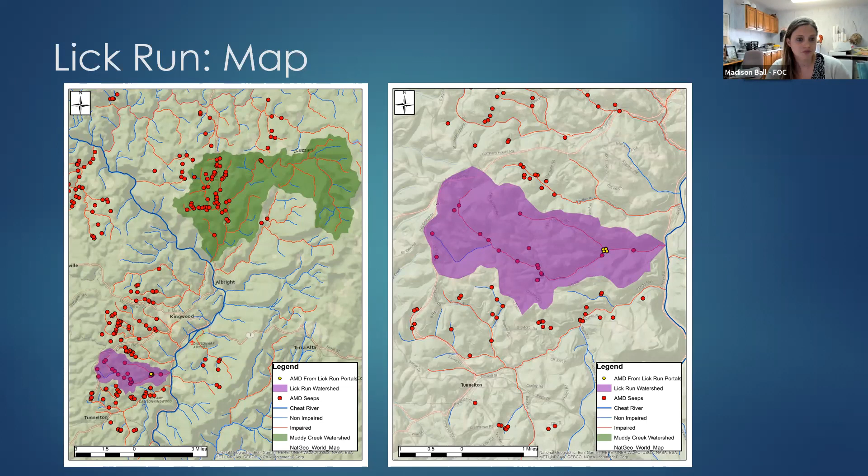Going into the history generally of the site. So it was mined extensively prior to 1977. In between 1977 and 2007, there had been different efforts from other entities to restore and reclaim this site. Notably, I think the Army Corps of Engineers in the 90s had pursued different projects in this area.

But Friends of the Cheat, we did acquire the property, specifically that cluster of portals that I described in the previous slide. We acquired that property in 2007 for $1, which was a strategic effort on our part to be the landowner when and if the technology and the funding would exist in the future to treat this source. That would be just one less barrier to restoring the water quality here, not having to negotiate with a private landowner. So we would be the owner of the property. We're no stranger to adopting or purchasing some of these problem areas for future efforts. So that was something we accomplished in 2007.

And since then, in 2017, there was a land reclamation project that the West Virginia Department of Environmental Protection, their Office of Abandoned Mine Lands, pursued. In this project, you can see the photo on the right. That's one of those portals.

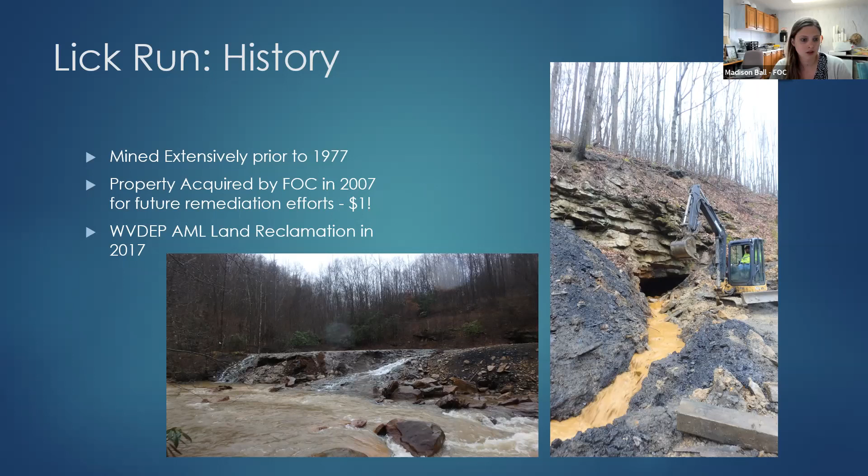Here's a picture of that scab a little bit higher up, where you can see that big deposit in the portal. In the photo on the left, you can see the portal where the water is emanating out of. That's pretty much what it looks like today. The rest of the portals at the site look like the photo on the right, where they've been addressed and that water can flow out safely without causing any potential issues down the road.

In terms of water quality, as I mentioned, with Muddy Creek being tackled and for the most part meeting its water quality standards, Lick Run is now our most significant contributor to acid mine drainage in the Cheat. This was more of a fun graphic. I've got some actual hard data that I'll go over in a moment. This is just a fun educational graphic we made a few years ago, using tons to show Lick Run surpassing Muddy Creek.

2019 was the year, I believe, where the Muddy Creek treatment plant had not fully started to treat until midway. So this was an average of our data through the year, which is why you're still seeing some of that iron in Muddy Creek. Additionally, it's important to remember flow and just how potent the water in Lick Run is. The flow of Lick Run is much smaller. It's a much smaller watershed than Muddy Creek.

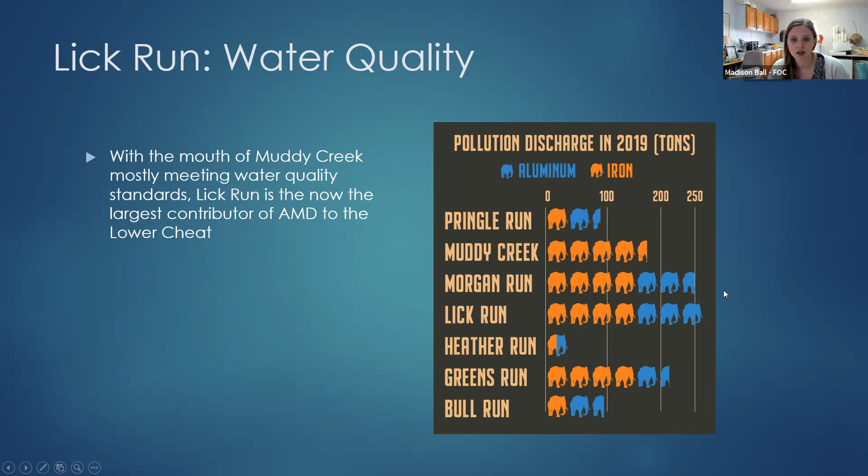So that highlights, and I'll show that later in the slides in our data, just how concentrated this water is, because Muddy Creek has flows sometimes 4, 5, 6 times higher than Lick Run, but yet now we have Lick Run contributing these high levels of aluminum and iron.

So what does that mean for the Cheat? These are some aerial shots taken in 2019. Where you see this very dark red spot, that's the mouth of Lick Run, very small compared to the Cheat River main stem. In low flow conditions, this creates this crazy rainbow sherbet effect of pollutants. So we're seeing the iron fallout, the aluminum fallout.

What's really concerning is how this is compounded with climate change. We know through other studies that we've partnered with NASA on that the Cheat River in Preston and Tucker counties is experiencing more dramatic high flows, but also low flows in drought conditions. So when there's not enough water in the Cheat main stem to dilute the potent water that comes from Lick Run, we're seeing these effects.

It doesn't take a rocket scientist to understand that this is a very huge impact for any sort of aquatic species living in this reach of the river. And I would argue it essentially creates an acid barrier, probably, for mobility of our aquatic species.

So digging a little bit into the water chemistry and the water quality, I've pulled out what we call our mouth sweeps. We do these twice a year. I just pulled our most recent set in October as an example, but we do have a pretty extensive data set. If anyone is ever interested in that, please reach out to me at any time and I'm happy to share our data.

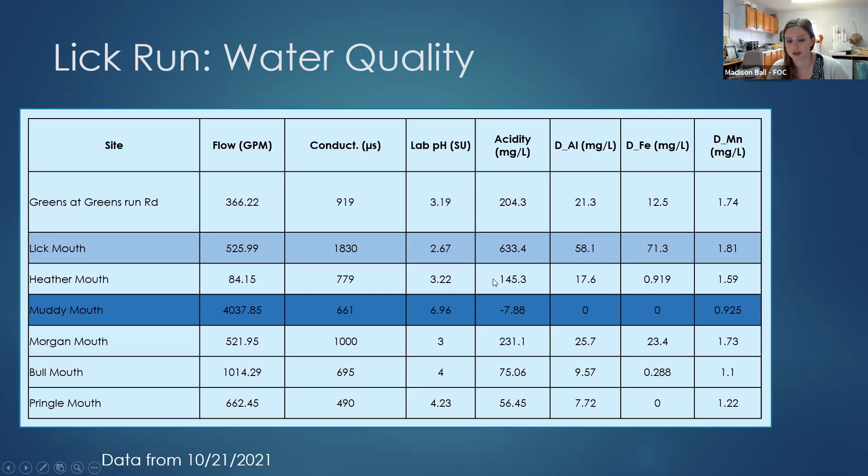So how that relates to loads. So right now, based on just the snapshot of data from October, we're seeing Muddy Creek contributing pretty much no acidity loading, actually providing alkalinity. I didn't include alkalinity in the slide before, but we do have that data available. So actually boosting the alkalinity in the Cheat main stem at the mouth.

And then when it comes to our dissolved aluminum and iron, we have very minimal amounts. And we also have very high dissolved aluminum and iron for Lick Run.

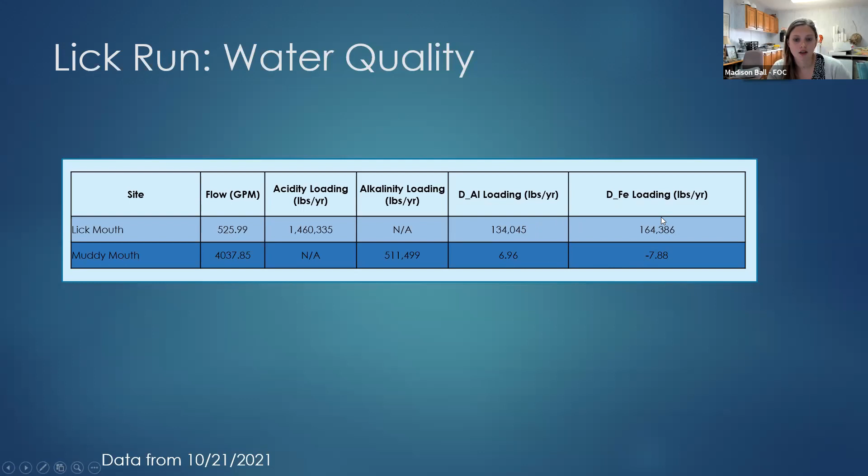In terms of treatment options, this has been a really difficult site. It's very challenging because of these extremely high concentrations of pollutants. It makes passive treatment options very, very limited. A few years ago, we had hoped to secure funds for a potential pre-treatment option to potentially reduce some of the iron loadings in this site. But unfortunately that didn't pan out.

And when it comes to active treatment options, which seems like a better fit if we are going to actually completely tackle the water quality issues at this site, we have extreme challenges with topography. Lick Run exists in a very tight holler, so to say, and there's not a lot of flat ground to build a treatment facility. The one site in question is already being developed for our trailhead for the Cheat River Rail Trail.

On top of that, there would have been a lot of challenges with piping that water to a treatment facility. And additionally, to put a treatment facility right at the site with our portals, we don't have electricity. There's no sort of infrastructure at the moment to bring electricity up into that holler. It would all have to be developed from the bottom level.

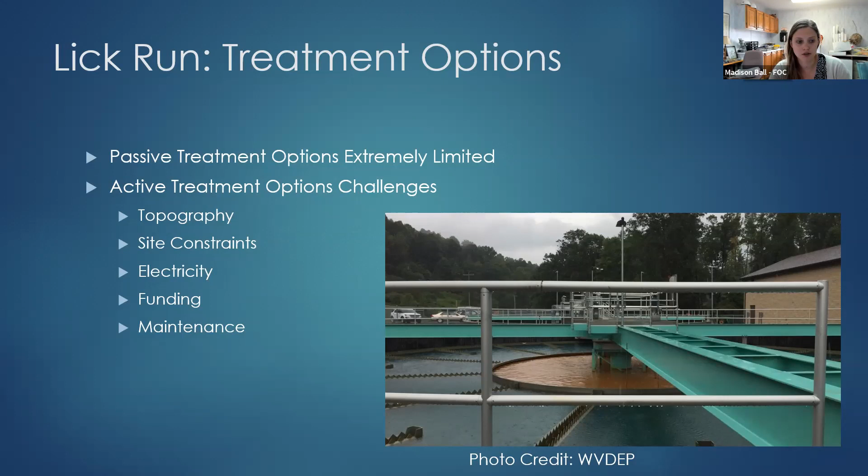And in terms of the future, what does it mean for the future? We are hopeful. Like I mentioned, we do think it was a good move to purchase the property for future development. And it sounds like there is some hope on the horizon in terms of the big infrastructure package and what that means for Lick Run, if there's potential to tap into those resources to address the Lick Run site.

Regardless of funding, it will take an innovative approach and thinking and likely partnerships among many groups to tackle this issue and design a site that is appropriate for the different elements at this site.

And then there's also the exciting prospect of rare earth elements because of the high concentration and unique water chemistry at this site. It does appear that this could be a very lucrative site for the development of rare earth element extraction. But we know that that's very new and kind of a breaking edge. So we're just kind of waiting to see what that could look like for Lick Run.

And with that, that's a summary of my presentation, and I'm open for any questions or thoughts.

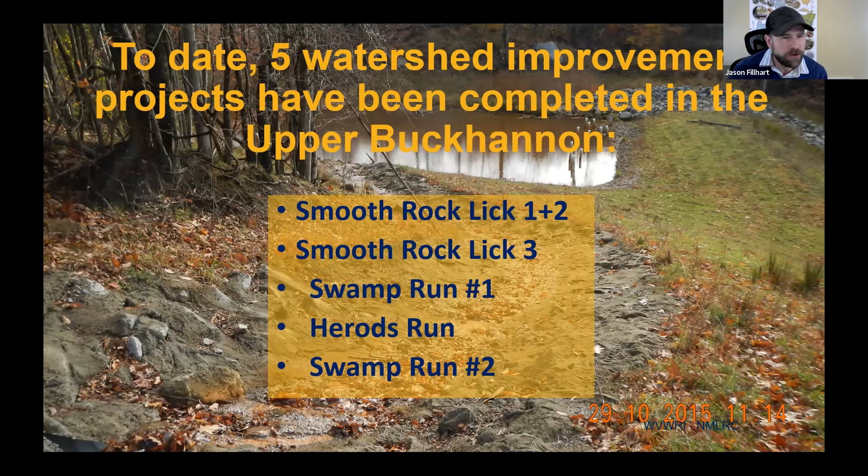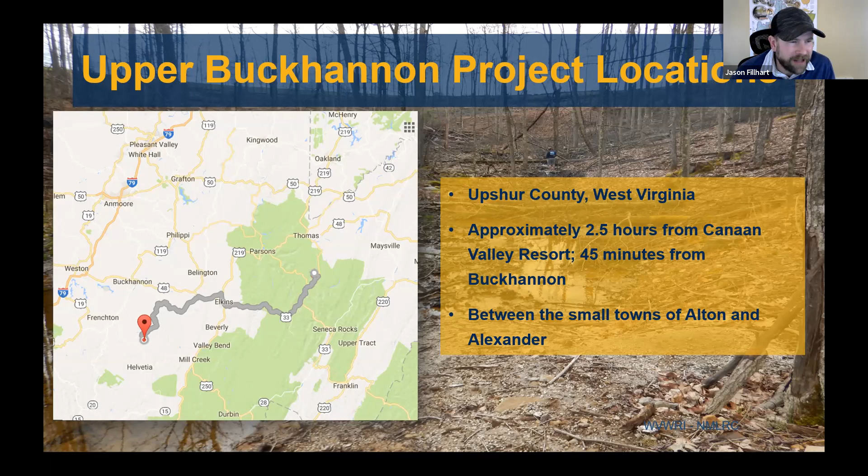A little bit about the project location. On the map to the left there, you can see it is about 45 minutes southeast of Buckhannon. All these projects are located in Upshur County, West Virginia, approximately 2.5 hours from the Canaan Valley Resort. The closest towns would be Alton and Alexander, which are very small towns there in Upshur County. From a watershed perspective, it's in the Tygart Valley River watershed, and they are all small headwater streams which drain directly into the Buckhannon.

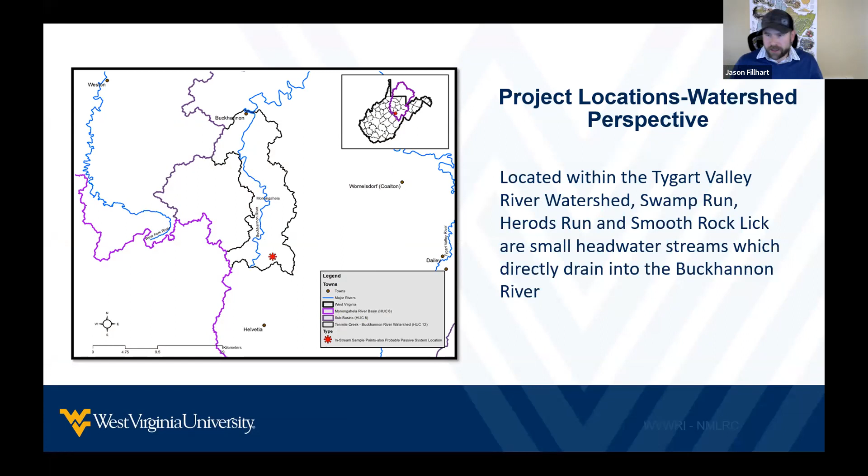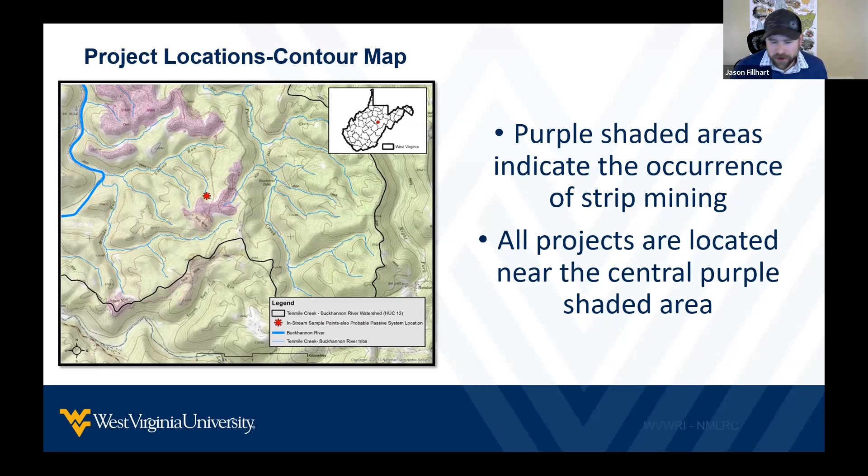Getting a little bit more of a close-up perspective, as you can see from the map, these projects are located near these purple shaded areas which indicate the occurrence of strip mining. The star there indicates right around the central location where all these projects have been installed, and they're all within about half a mile to a mile of each other.

So we continued on with our Smooth Rock Lick operations with treating number 1 and number 2. This was a little bit of a larger project. We completed it in 2013, around $250,000 for the engineering and construction costs. This really helped to decrease the overall loads in Smooth Rock Lick, and of course increase the pH. Some of our field folks were out there last week, so we don't have our analytical results back yet, but the field results indicated that we're just below 7 on the pH with a lower conductivity. Just some anecdotal evidence that the system is still working there.

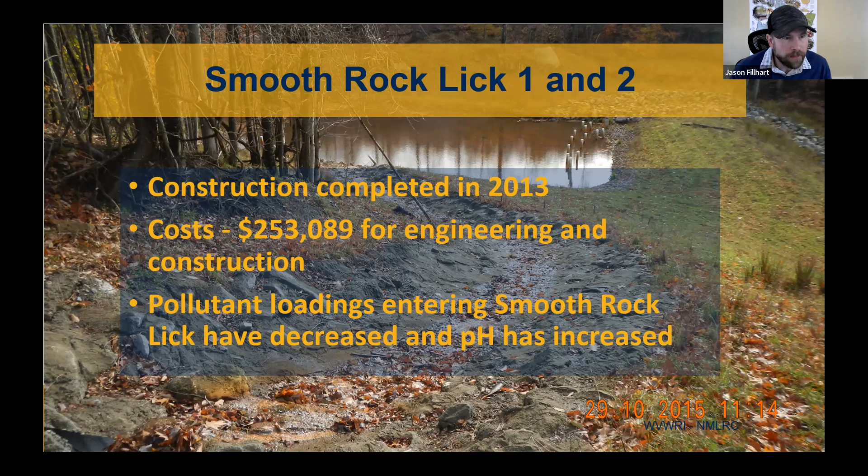All right, so moving on to our largest project to date, which would be our Swamp Run number 1 project. This project was, again, a partnership between us and the Buckhannon River Watershed Association, and the Watershed Improvement Branch from the DEP contributed 319 funds. I guess I should have mentioned this earlier, but a lot of these projects were covered through NPS 319 funds and WCAP funds from OSM. So they contributed to this project in a really large way.

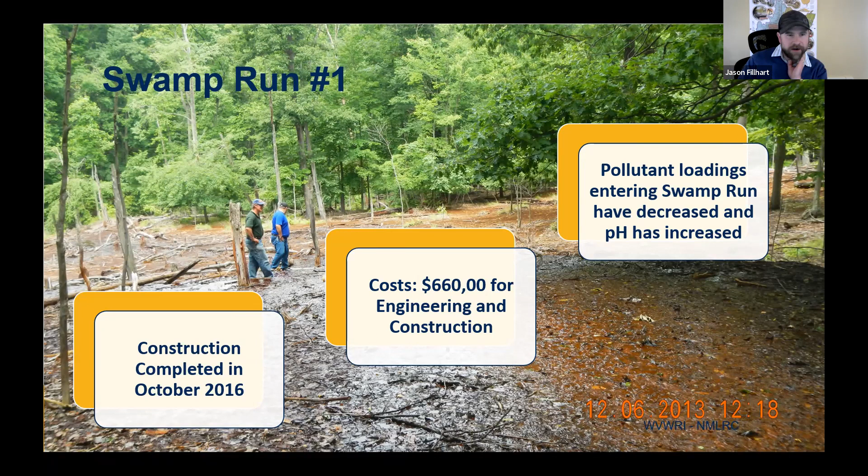But the picture in the background that you can see there is, of course, at our Swamp Run number 1 site location. This is what we considered the iron mound. Martin Chris there from the DEP and Brady Gutta, one of our old project managers here at WRI, are in the background. But this was probably about 2 acres of an area here in the forest where the iron precipitates had spread over the soil and basically caused everything to either die or, of course, no new growth was occurring because of this iron mound terrace.

So getting into just a little bit of the data here, as you can see, we have a pH in the raw water of about 3. And then by the time we're hitting wetland out, depending on if you're looking at the lab data or field data, we're between 6 and 7. Our limestone leach bed, we were actually getting a higher pH a few years ago. So I think that we have to go in now that this system's probably about 6 years old and stir that limestone in the primary limestone leach bed just to get more reaction and more treatment.

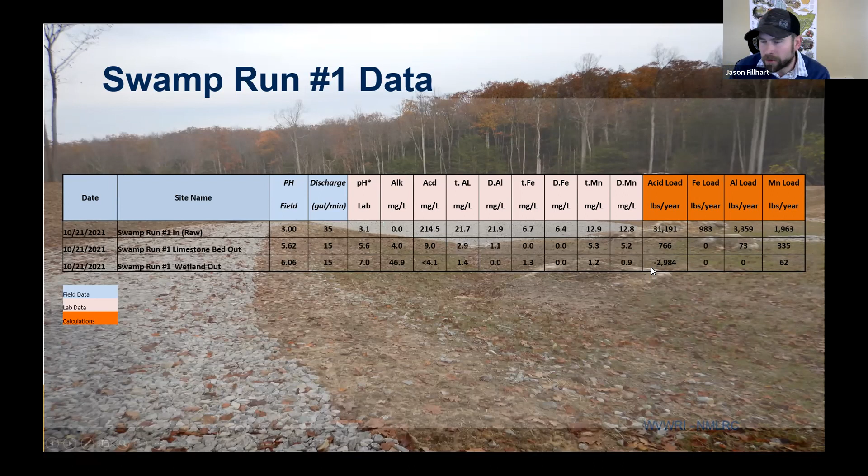All right, so moving on to Herod's Run. This one was completed in 2018, just a little bit over 300,000 for construction and engineering. This system consists of an open limestone channel. We have a few smaller limestone leach beds, and then again at the end we have a polishing aerobic wetland. We've definitely seen a great increase in pH here. We're actually hovering in between about 6.5 and 7 on the outflow. And also, of course, we're helping to reduce the pollutant loads entering Herod's Run.

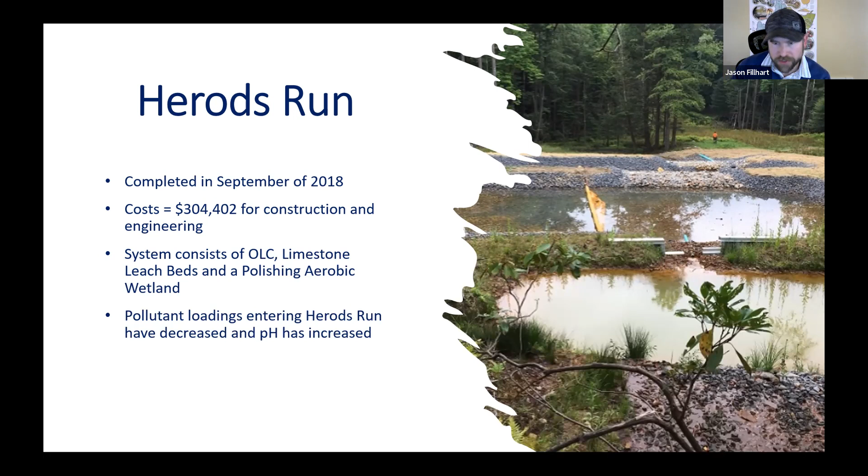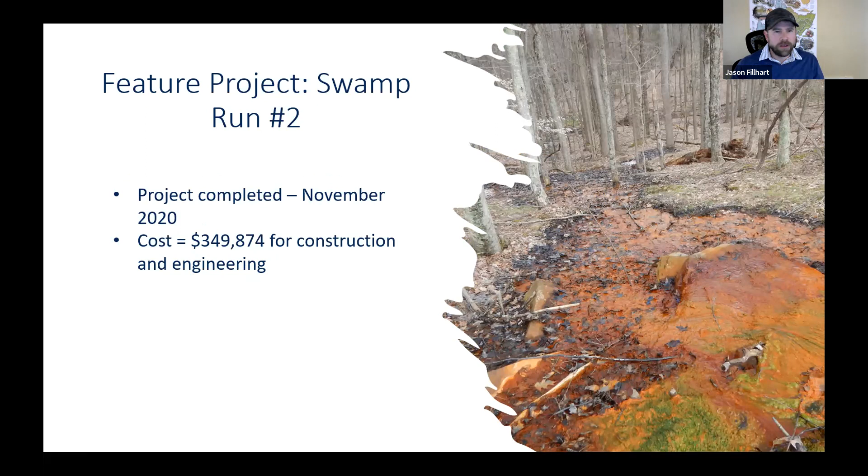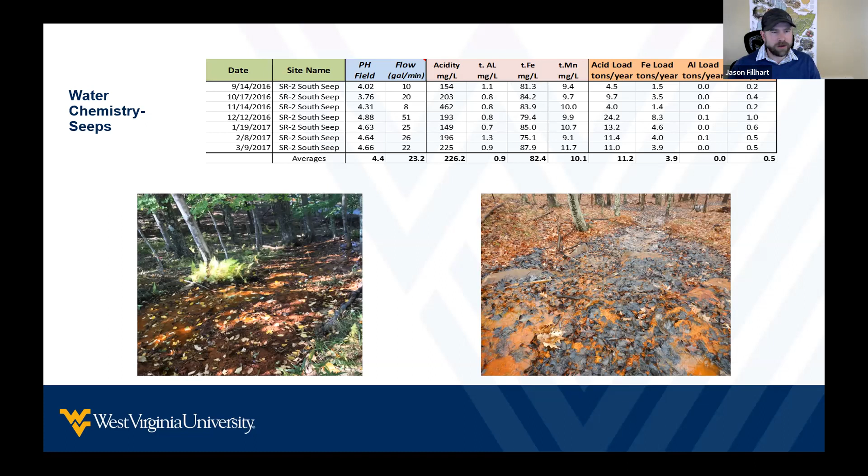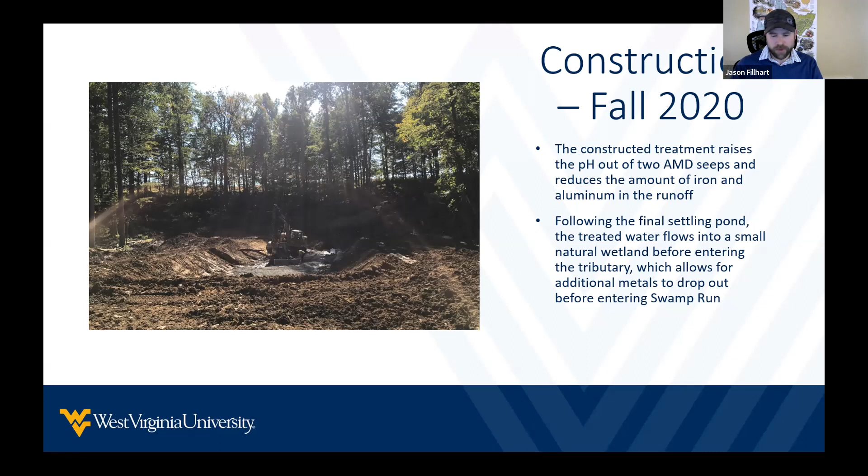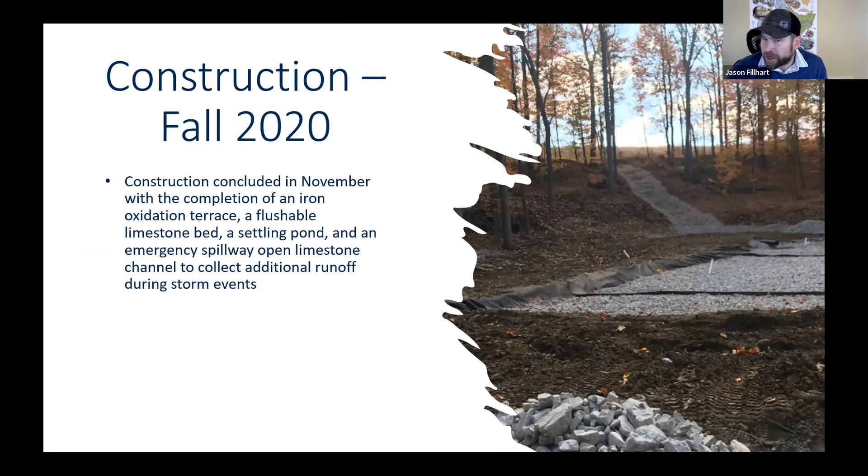Again, construction concluded in November. We completed the iron oxidation terrace, flushable limestone leach bed, settling pond, and then we also have an open limestone channel, which we use as an emergency spillway during large storm events. This is a photo of our completed iron oxidation terrace.

So the project partners went back out in the fall of '21 after the stormwater permit was closed. And again, you can note the revegetation from the previous slides. So that would have been that same area from below now in 2021. So everything was revegetated well enough to close the stormwater permit. And we also collected samples while we're out there.

So our preliminary data, it appears that we're reducing iron from 94 to 99%. pH entering the system about 3.5, upon exiting it's about 6.1, and we're also seeing a reduction in total acidity with a rise in alkalinity.

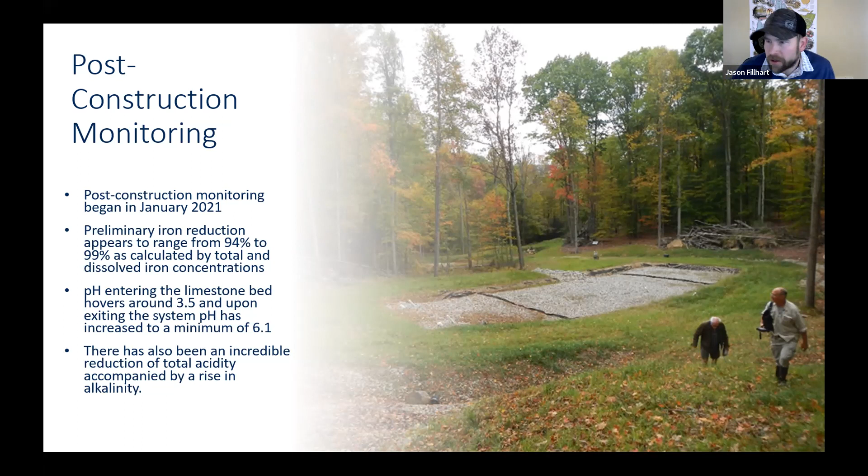Getting into a little bit of the data here. Again, pH from the seep about 5.2, but by the time it hits the primary treatment of the limestone leach bed, it's about 3.5. And then on the average outflow, we're at about 6.5. And then we're also seeing a load entering the system of about 6,000 pounds per year. And then exiting, we're actually net alkaline in the system.

If we look at our load reductions, we're reducing acidity from 6,063 pounds per year to a net alkalinity. And then dissolved iron about close to 2,000 pounds per year, just a little bit of aluminum. And then we're also reducing manganese by about 87 pounds per year.

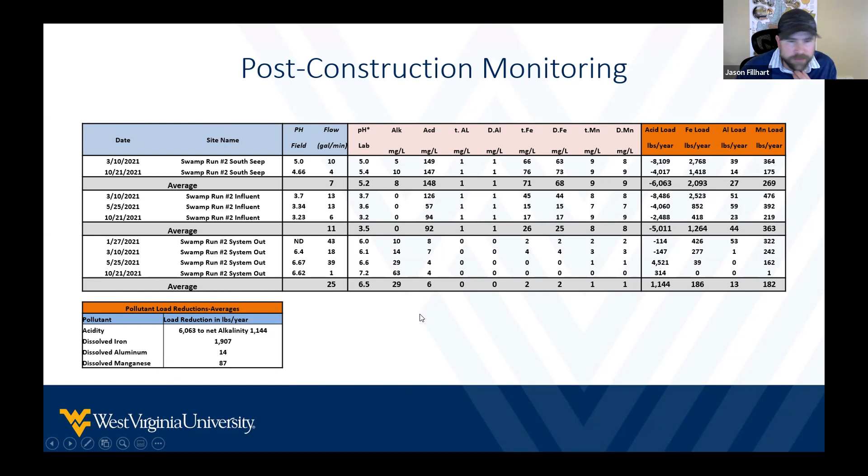All right, so discussing a little bit of the success here. So again, to date, 5 AMD abatement projects have been installed in the Upper Buckhannon River watershed. Another project that we're going to work on, this is our future project, is going to be Swamp Run, increasing the size and the scope of Swamp Run number 2 to further remove pollutants.

And then the Smooth Rock Lick projects have dramatically improved the water and stream health in Smooth Rock Lick. Once a heavily degraded stream devoid of any significant aquatic life, the improvements have led to the West Virginia Department of Natural Resources recently transplanting native brook trout into Smooth Rock Lick.

The early indications point to increased macroinvertebrate life, and then with the introduction of the brook trout, that they are surviving, and that it has potential to become a viable native brook trout fishery. And they have actually located, through electroshocking, young of the year for the native brook trout.

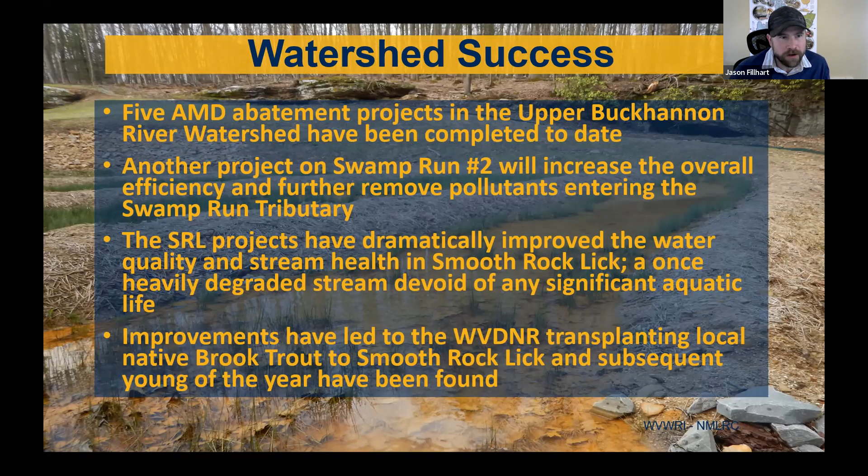All right, so some of our benefits and our goals. Our benefits are obviously the reintroduction of the brook trout into Smooth Rock Lick, and along with that, the increased macroinvertebrate life in the streams. Some of our goals with these systems are to reduce the pollutant loadings from the AMD sources to the 3 tributaries by a minimum of 80%. We want to increase the overall pH in the tribs to above 5.

And then through the introduction of the various wetlands within the systems, we want to provide beneficial habitat for migratory birds and other species. And we'd also, with these systems, like to assist in restoring over 2 miles of streams, hopefully providing cold water sanctuary for trout migrating up the stream from the Buckhannon River.

And some of our optimistic goals or benefits will be meeting the TMDL requirements for Swamp Run and Smooth Rock, and removing each of them from the state's 303(d) list of impaired streams. We'd also like to see more diversification of benthic macroinvertebrate communities and restore suitable habitat and water quality to support native brook trout within these watersheds.

And overall, with the introduction of these treatment systems, we really are looking to improve the water quality in the Buckhannon River, which is a significant trout fishery in the region.

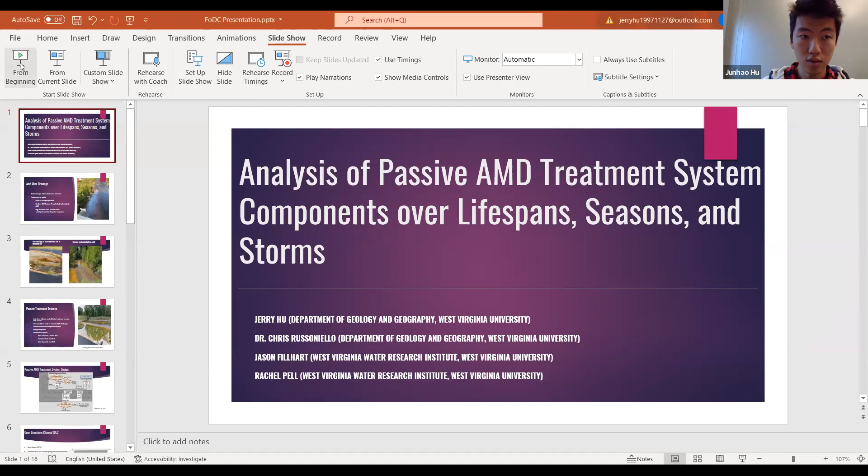Today I'm going to tell you a little bit about my master's thesis project, which is an analysis of passive acid mine drainage system components over lifespan, seasons, and storms.

A little bit of background about acid mine drainage. It's basically just acidic drainage rich in sulfate, iron, and aluminum, but also many other dissolved metals. And that's really bad for aquatic ecosystems in general, but especially fish, because of the high dissolved metal concentration and the high acidity. Northern West Virginia and western Pennsylvania, this region in general, is particularly vulnerable to acid mine drainage because we have pretty high sulfate content in the coal.

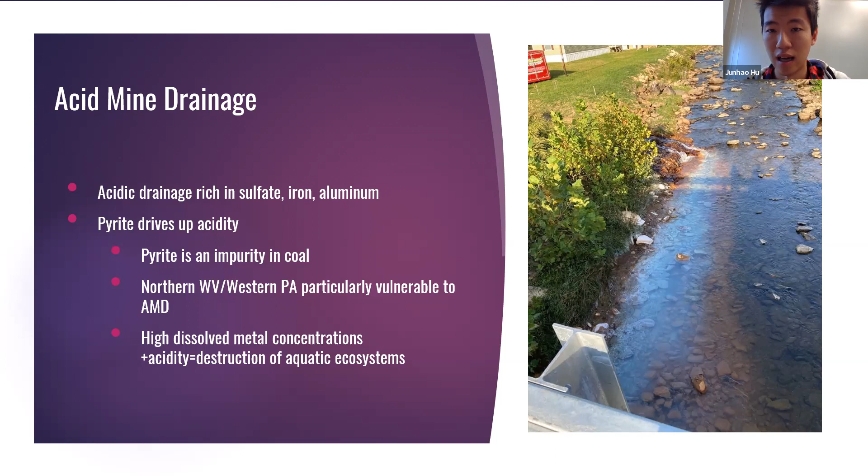Here's a picture I took east of Morgantown, just east of Brookhaven. As you can see here, we've got some aluminum precipitate, the white stuff here, and the brownish red iron precipitate. And that's from an untreated acid mine drainage source.

So if you see a clear looking river, it doesn't necessarily mean that stream is not affected by acid mine drainage. Instead, it could be that it just has really bad acid mine drainage to the extent that pH is lower than 3. And this is a typical stream contaminated by acid mine drainage in Pennsylvania.

So, passive treatment systems. The reason we're interested in looking at passive treatment systems is because they're really common in this area. It's a very cost-effective way of treating acid mine drainage. We also have some active treatment systems here, but those are more expensive. They take a lot more manpower and money to maintain.

And passive treatment systems do need regular maintenance and inspection to make sure they function as designed. So that's important here. But many of the systems in this region are old and lack maintenance. So that's something we also want to look at: how long do those systems actually last, and what kind of efforts can be put into renovating those systems?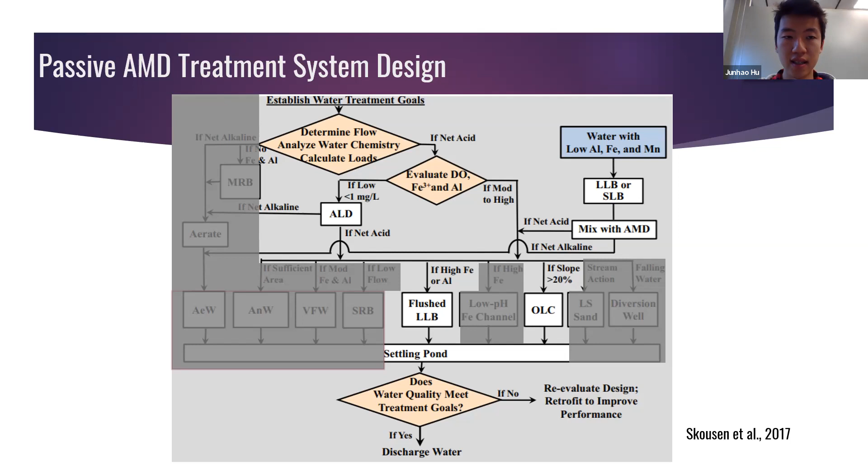So ideally, when the water comes out of the outlet, we end up with a much higher pH. And in turn, we will also have the dissolved metals precipitated out. So it results in overall improvement of water quality. Open limestone channel, just like other passive and active systems, needs regular maintenance. And the way we maintain it is by flushing it during high precipitation events to get rid of the accumulated solids and the coating, but also expose fresh surfaces. So once in a while, we have to stir it a little bit to get rid of some of the coating and to make sure we always have fresh surface exposed for neutralizing reactions.

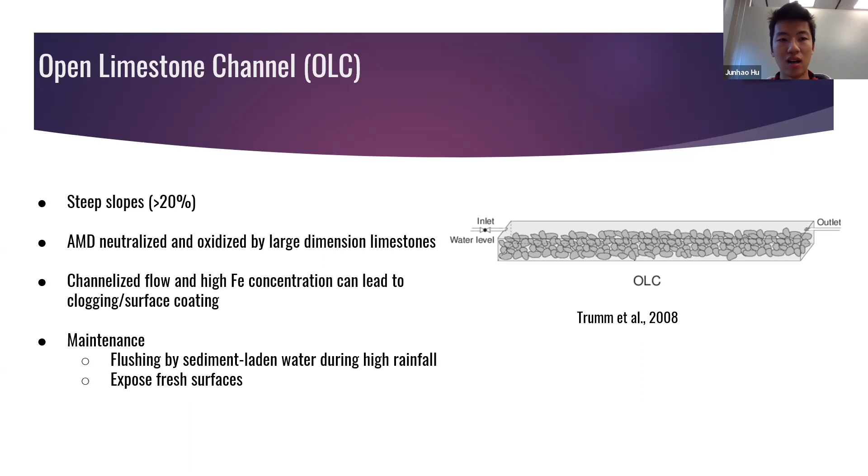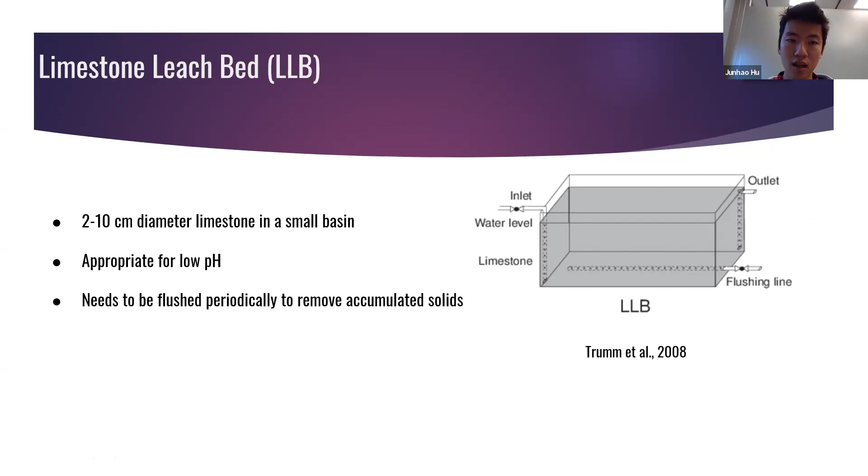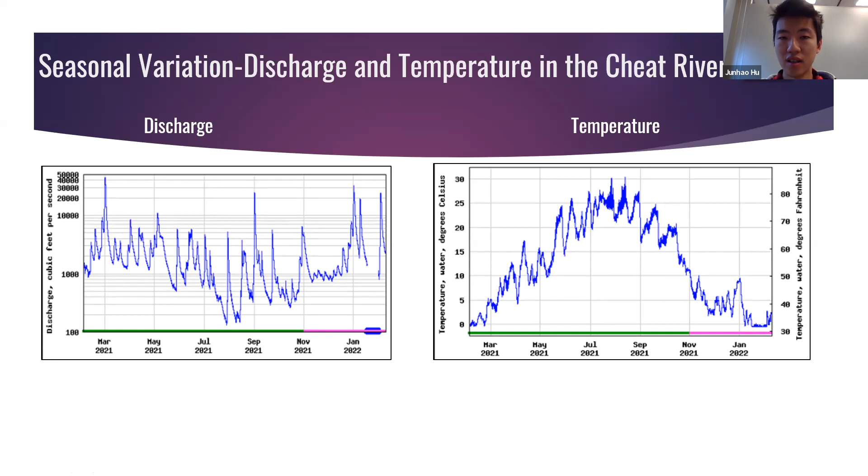So as I mentioned, flushing of those passive systems sometimes helps get rid of the coating and accumulated solids. So that's one thing that's interesting about seasonal variation. If we have a high precipitation event or higher flow in general, there is a chance the system might actually work better in that kind of condition and doesn't work as well in a base flow condition.

Also, with acid mine drainage, if we go back to the chemistry, if the acid mine drainage source is submerged, there's a chance it doesn't have any surface to oxidize. So in that case, we won't have as much acidity coming out of the source. So that might help with the water chemistry too. So those are some factors we want to look at. And if we get a result and take those factors into account, hopefully it'll help with the future design of acid mine drainage treatment systems.

So here's how we're gonna do it. We're gonna sample our sites, which are open limestone channel and limestone leach bed sites of different ages. We're gonna sample them every month, and we're also gonna do storm sampling. So if there's a high flow event, like a really heavy rain, we're gonna go out to sample. And we're gonna look at some pretty typical water chemistry parameters like alkalinity, dissolved metals, and also the hydrological data, which is the discharge and temperature.

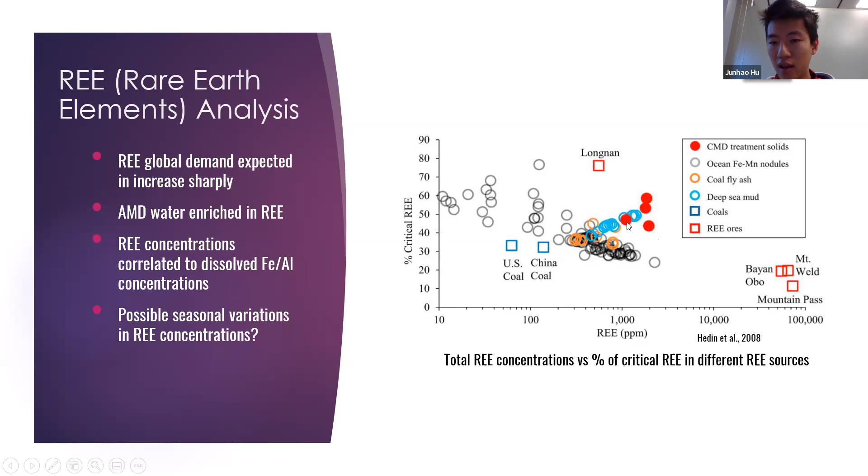So it seems like, after actual mining, coal mine drainage sources are actually pretty good compared to other possible sources of rare earth elements. You have pretty high critical rare earth element content, which is the one we actually use frequently in industry, and relatively high rare earth element concentration in general.